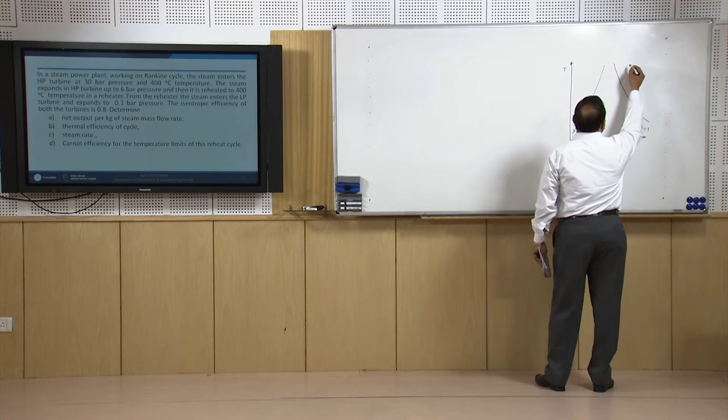So at 30 bar, 400 degree centigrade, the steam enters the turbine. P1 is 30 bar and T1 is 400 degree centigrade. The steam expands in the HP turbine up to 6 bar pressure and is then reheated to 400 degree centigrade again.

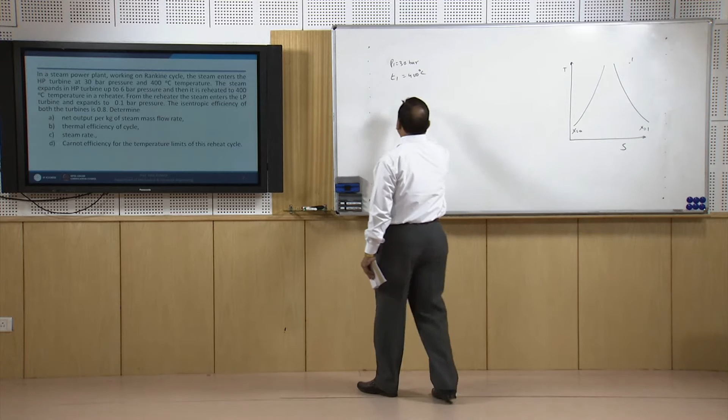That temperature is restored in a reheater. From the reheater, the steam enters the low pressure turbine and expands to 0.1 bar pressure. The isentropic efficiency of both turbines is 0.8.

Now let us find out the state of steam at 30 bar pressure and 400 degree centigrade temperature. Looking at the steam table, 30 bar is 3 megapascal. At 3 megapascal pressure, the saturation temperature is 233.85 degree centigrade, which means the steam is superheated.

For superheated steam at 400 degree centigrade, the enthalpy of the steam is, sorry, the enthalpy is 3231.7 kilojoules per kg. So H1 is 3231.7 kilojoules per kg, and T1 is already given, so it is superheated steam.

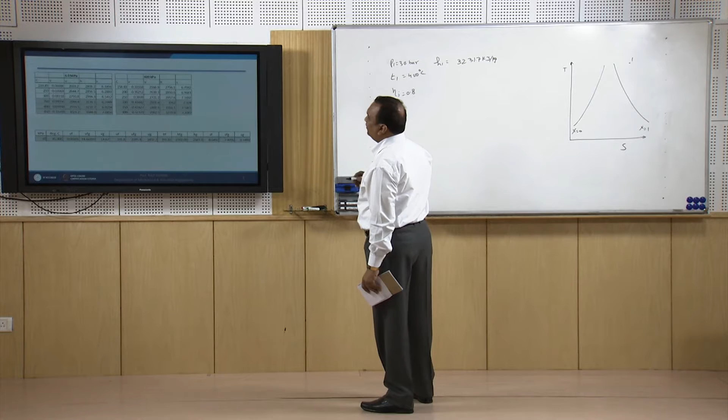Now for entropy, since the expansion is an isentropic process, the entropy at this stage is 6.9232 kilojoules per kg Kelvin.

So we have the state fixed. Now isentropic expansion takes place up to 6 bar, state 2. At 6 bar, entropy remains constant. Let us look at the properties at 6 bar, that is 600 kilopascal, with constant entropy.

When the entropy remains constant, for saturated vapor the entropy is 6.7592. It means at 6 bar the steam is still superheated, and through cross interpolation, because at 400 degree centigrade it is 7.7, 6.92 will lie between these two temperatures, 200 degree and 158 degree. So linear interpolation will be done.

We get the value S2 is equal to 6.9232, equal to SF plus X times SFG. A similar type of numerical we have solved in the respective lecture related to vapor power cycles. From here we get the value of X. Now for H2, I have done the cross interpolation.

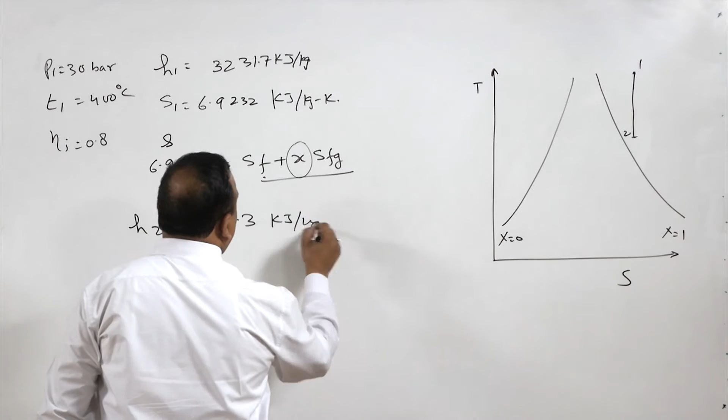Now H2 is 2830.3 kilojoules per kg. X we cannot calculate because this is already superheated, so that cannot be done. So the vapor is superheated at state 1, it is expanded to state 2.

At state 2 it appears to be superheated, and it is superheated because the entropy is 6.7592 and here the entropy is 6.9232. So it is superheated, and through linear interpolation we have calculated the value of H2S. So H1 is 3231.7 and H2 is 2830.3 kilojoules per kg.

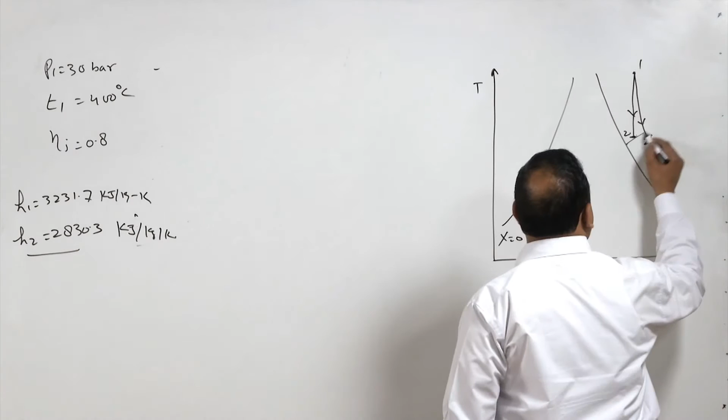But this is not an isentropic process. In actual, the process is like this, this is 2 dash, and it is falling on this line. So H2 dash, then H2 dash minus H1 divided by H2 minus, sorry.

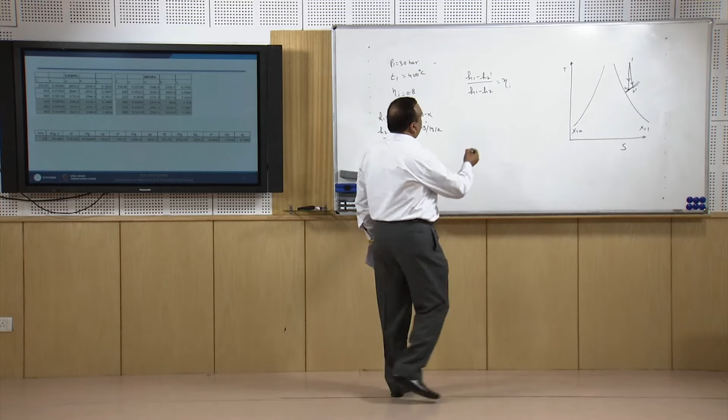H1 minus H2 dash divided by H1 minus H2 is equal to the isentropic efficiency of the turbine, which is already given. We have the values of H1 and H2 as well, so H2 dash can be calculated from here, and H2 dash is 2910.9 kilojoules per kg.

Now this superheated vapor is reheated up to state 3, again at 400 degrees centigrade. So T3 is 400 degrees centigrade. From here, the properties of superheated vapor at 400 degrees centigrade give us the value of enthalpy. H3 is 3270.8 kilojoules per kg, this is enthalpy at state 3.

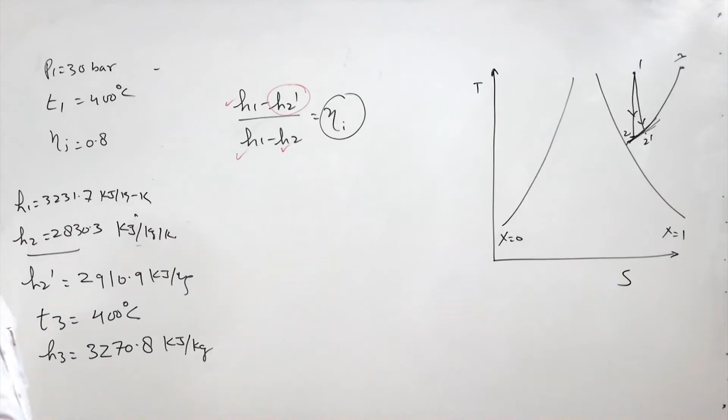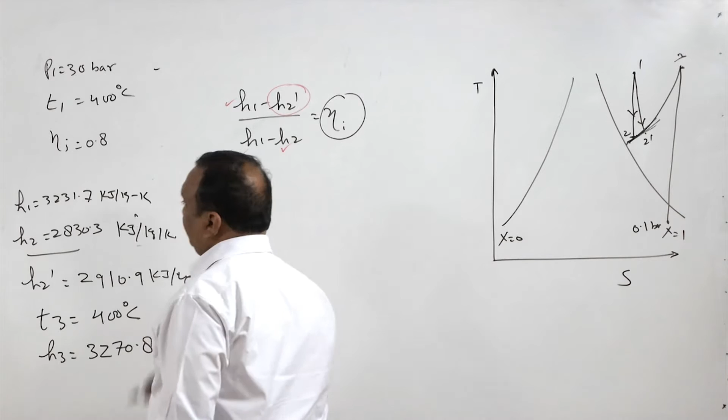Now again the steam is expanding and going up to 0.1 bar. Now entropy at state 3, S3, at 600 kilopascal, 400 degrees, is 7.7097 kilojoules per kg.

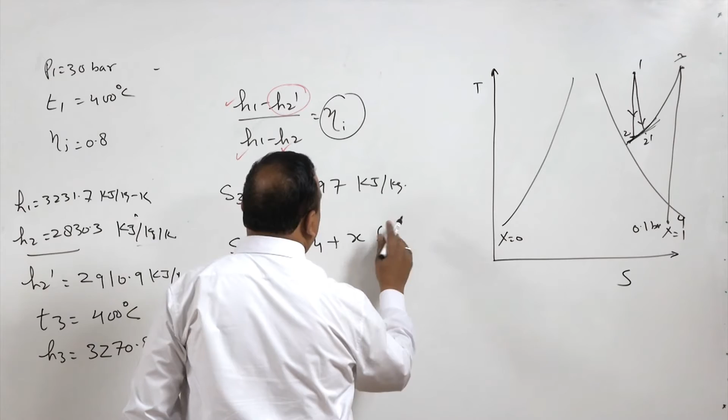Entropy at 0.1 bar, that is 10 kilopascal, is 8.1488. This means the quality of vapor is less than 1. So we will take S3 equal to SF4 plus X times SFG4. Entropy at state 3 is equal to entropy at state 4, because for saturated vapor, the entropy of saturated vapor at state 4 is higher than the entropy at state 3. That is why the vapor available at state 4 does not have quality equal to 1, it is quality less than 1.

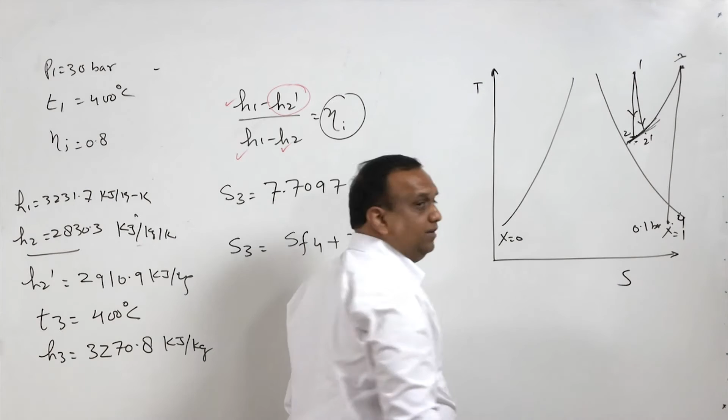I am repeating the steps. First, we have taken superheated steam at state 1, with properties taken from the steam table at 400 degree centigrade temperature and 30 bar. Steam is expanded to 6 bar. We have compared the properties and found that at 6 bar, or 600 kilopascal, the steam is still superheated. By linear interpolation from the steam table, we have calculated the enthalpy at state 2. Efficiency is given, so we have calculated the enthalpy at state 2 dash because efficiency is 0.8.

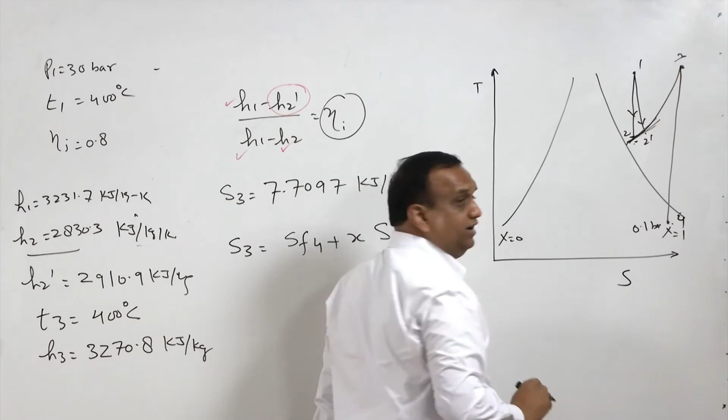Then it is again reheated to state 3, which is at 400 degree centigrade. Those properties are also taken from the steam table for superheated vapor at 600 kilopascal. Then steam is expanded in the low pressure turbine, and at the exit the pressure is 0.1 bar. We have compared the entropies and found that the quality is less than 1. So we are going to use this equation.

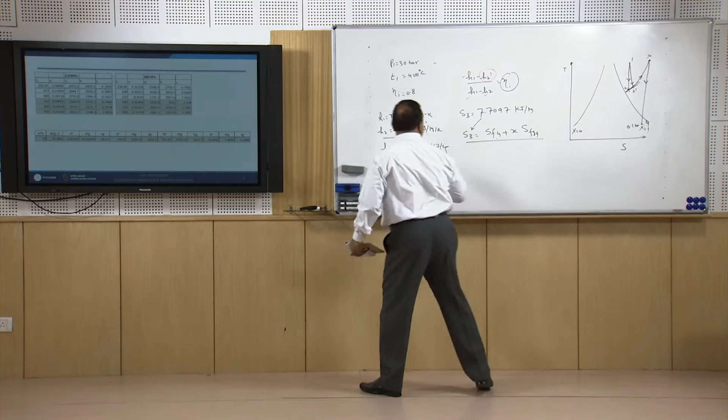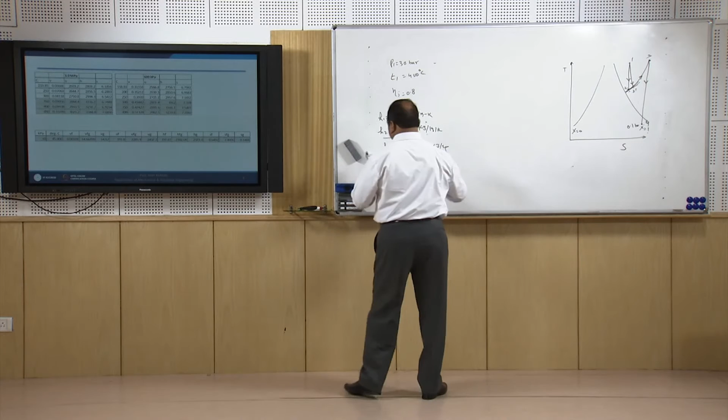S3 we have taken from here, SF4 and SFG4, and SFG4 shall be taken from the steam table, and after manipulation the value of quality is 0.94. So X is equal to 0.94, that is the quality of vapor at this state. Once we have the quality of vapor at this state, we can find H4 as HF4 plus X times HFG4. Using this equation, when we calculate the value of H4, we get H4 as 2440.4 kilojoules per kg.

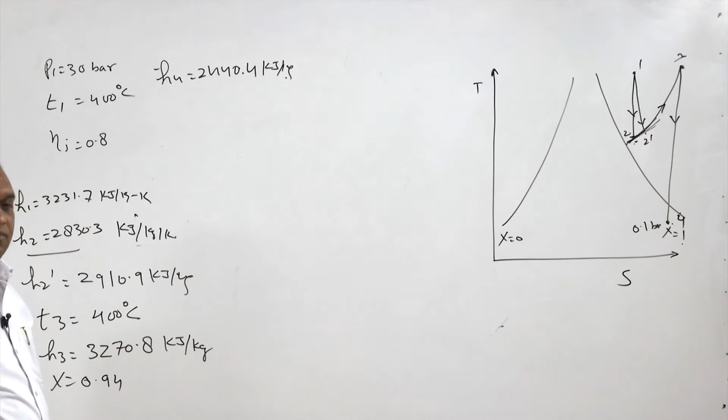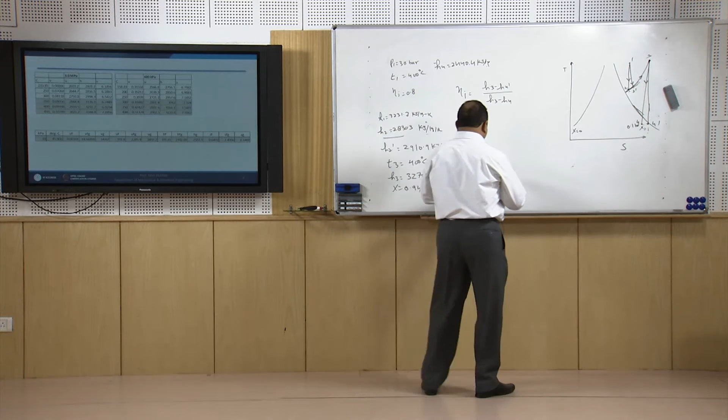But this process is also not isentropic. So we get another state, 4 dash. And for 4 dash, again isentropic efficiency is H3 minus H4 dash, divided by H3 minus H4. Now from here we get the enthalpy at 4 dash. So H4 dash is 2606.5 kilojoules per kg.

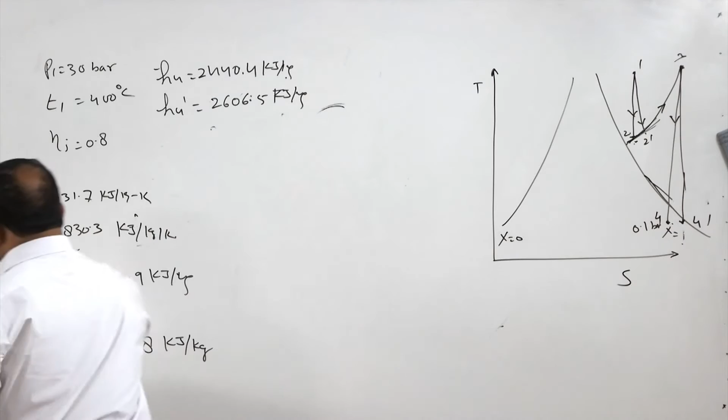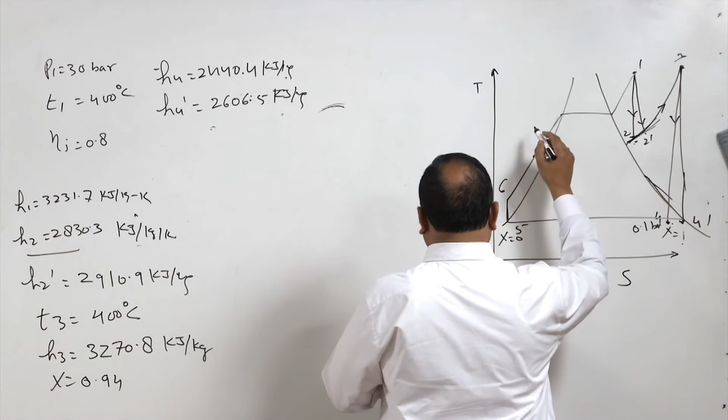Now we have enthalpies at all the salient points. This vapor is then available at the exit of the turbine. It is condensed, fully condensed, then we get state 5, then pressurized, and then it goes to the boiler, and then like this: 5, 6, 7, and then 1, this is 8 and then 1. So feed water goes to the boiler at pressure at state 6, heat is added here up to state 1, expansion in high pressure turbine, then again reheat, then expansion in low pressure turbine, and then condensation in condenser.

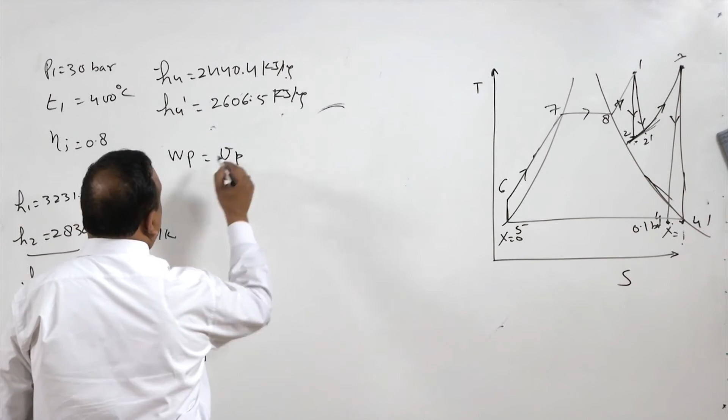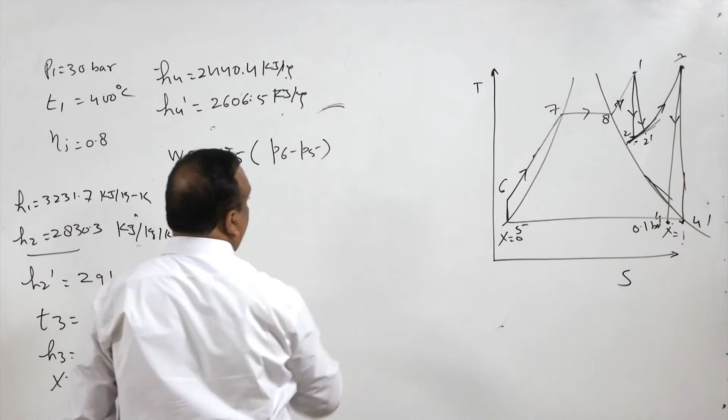Now work of the pump is equal to specific volume at state 5 times P6 minus P5. P5 is 0.1 bar, P6 is 30 bar. So it is 101 into 10 to power minus 5, times 30 minus 0.1 into 10 to power 2. That gives kilojoules per kg input given by the pump, that is V dP. Because this is given in bar, we have converted into kilopascal. This pressure in bar is converted into pressure in kilopascal, and then we have calculated the work of the pump.

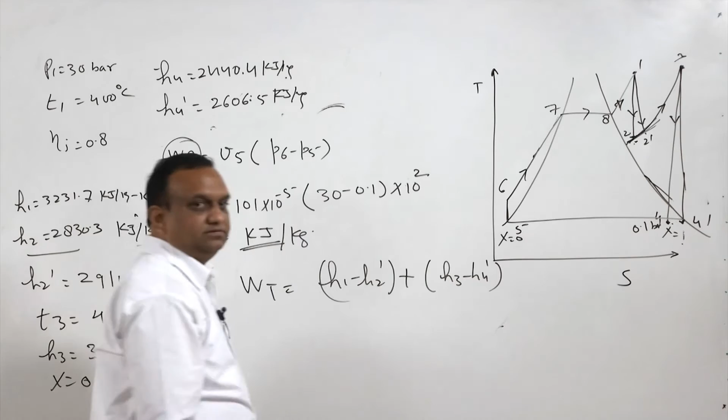Now work of the turbine is equal to H1 minus H2 dash plus H3 minus H4 dash. This is because we are getting work output from here and work output from here. Net output is less because part of this energy is used for running the pump. So this will be minus work of the pump, giving the net output from the cycle. Output of the turbines minus energy consumed by the pump.

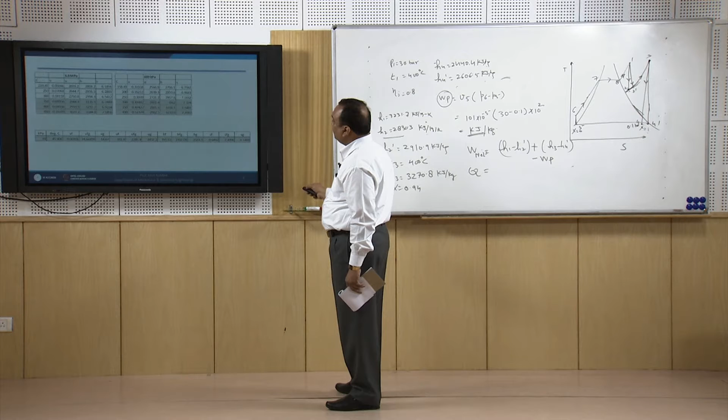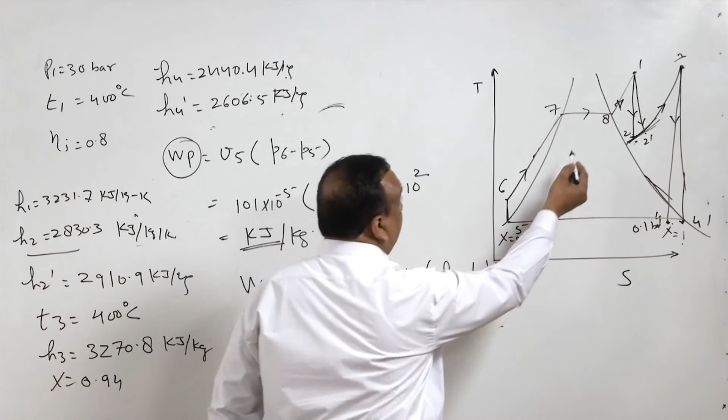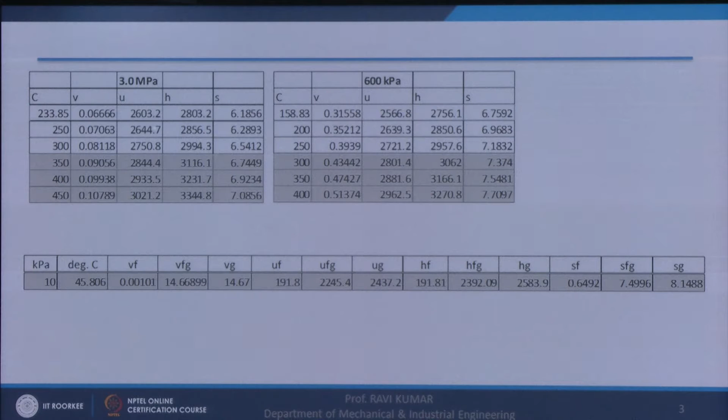So heat added during the process H6 to H1, we can take as H1 minus H5, this enthalpy minus that enthalpy, minus work consumed by the pump, because this energy is not added in the boiler.

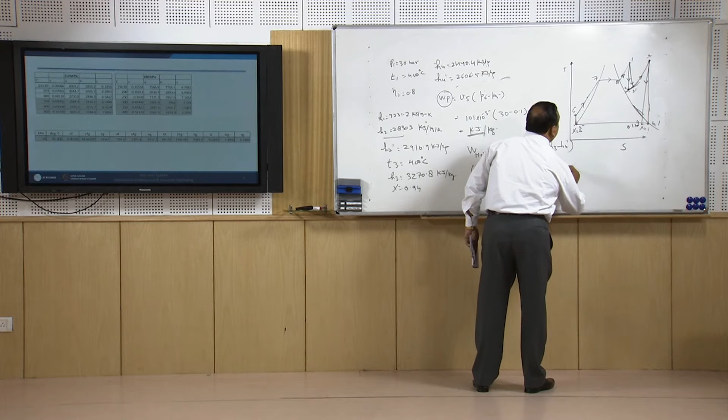So minus work of the pump. That is the net heat added from state 1 to state 6, plus heat added during state 3 to state 2 dash, because it is a reheat cycle, plus H3 minus H2 dash. This is the net amount of heat added in this cycle.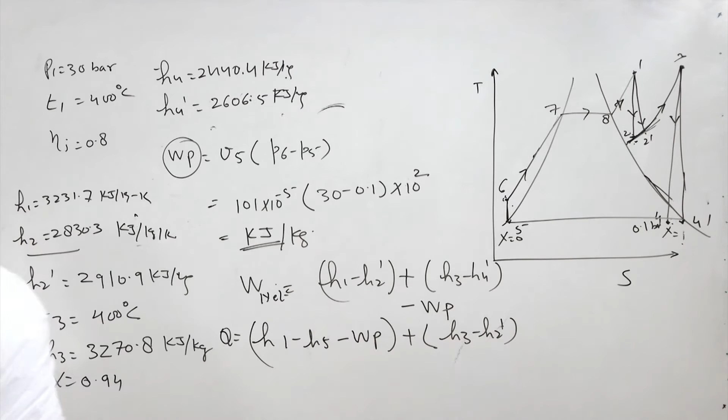So in this question we have to find the net output per kg of steam mass flow rate. The net output we are getting from this equation, all the values are known to us. Thermal efficiency of the cycle: we take the ratio of net output divided by heat supplied, which gives the thermal efficiency of the cycle.

Now the third one is steam rate. Steam rate is 3600 divided by W, that is the output, and this will be in kg per kilowatt hour.

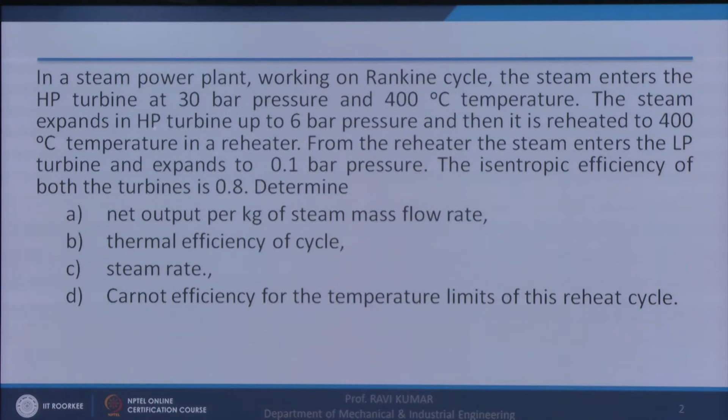Next is Carnot efficiency for the temperature limits of the reheat cycle. The minimum temperature is this, maximum temperature is this. So we can always calculate the Carnot efficiency of the cycle.

Now after this we will take another numerical on gas turbines. We will quickly go through the steps to solve this numerical.

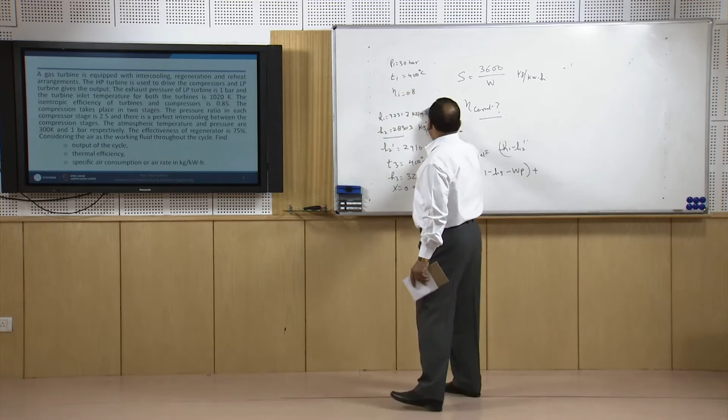This numerical has two-stage compression. The gas turbine is equipped with intercooling, regeneration and reheat arrangements. The HP turbine is used to drive the compressor and LP turbine gives the output. So there are two turbines, one driving the compressor and another giving the output.

The exhaust pressure of LP turbine is 1 bar and the turbine inlet temperature for both turbines is 1020 Kelvin. The isentropic efficiency of turbine and compressors is 0.85. The compression takes place in two stages, so there are two compressors and two turbines.

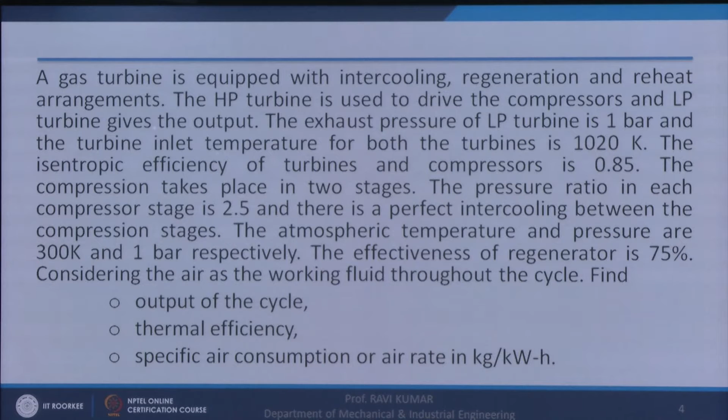The atmospheric temperature and pressure are 300 Kelvin and 1 bar respectively. The effectiveness of regeneration is 75%. Consider air as the working fluid throughout the cycle. Find the following: output of the cycle, thermal efficiency, specific air consumption in kg per kilowatt hour.

So it is a cycle drawn on a temperature-entropy diagram. It has two-stage compression: 1 to 2, with a certain isentropic efficiency to 2 dash, then cooling. After cooling, again it is 3 and then this is 3 dash.

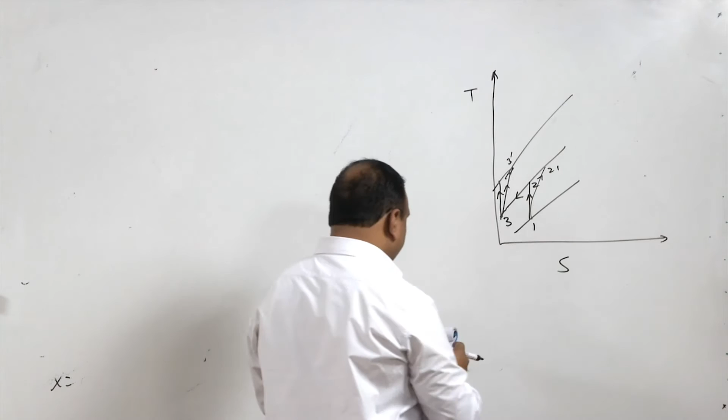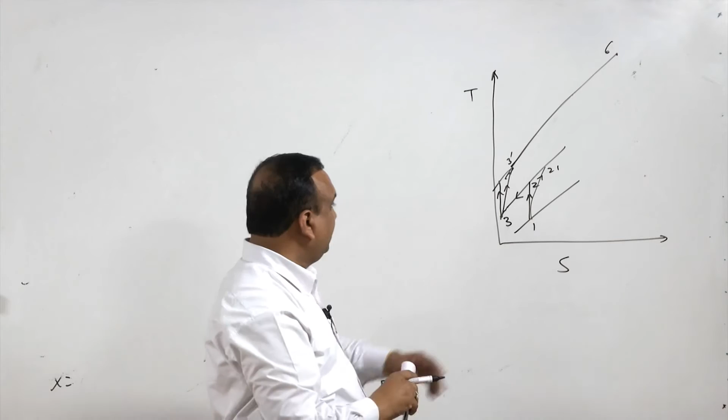So first compression, then intercooling, then again compression. Then in the combustion chamber there are two turbines. So the state is T6, and then expansion is the high pressure turbine.

Then we get T6 to 7, state 7, then again, temperature at 6 is equal to temperature at 8, then again expansion and we get state 9 and this is 9 dash.

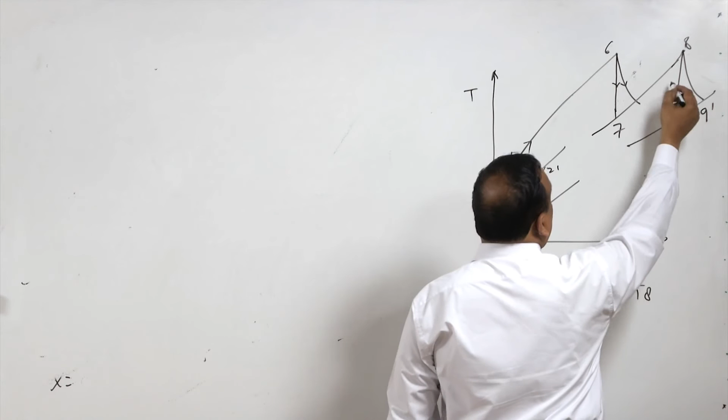So: compression, then cooling, because there is a perfect intercooling, then T1 is equal to T3, then heat addition, expansion in turbine, and then again reheating, and T6 is equal to T8, as given in the problem statement, then expansion in the high pressure turbine and low pressure turbine.

This is the arrangement. Now here, first of all, we will calculate the value of T2. T2 is equal to T1 multiplied by P2 by P1 raised to power gamma minus 1 over gamma. Now T1 is 300 and P2 is 2.5.

Pressure ratio in each compression stage is 2.5 raised to power 0.286, and this will give us 389.8 Kelvin. So T2 is 389.8 Kelvin.

Now, similarly, we will calculate T2 dash, and in order to calculate T2 dash, again the efficiency is equal to T2 minus T1 divided by T2 dash minus T1. Here we have the value of T2 and T1, and efficiency is also with us. So using these values we will get T2 dash as...

405.6 Kelvin. Now we need not calculate the value of T3 and T3 dash, because isentropic efficiency is same, so T2 dash is equal to T3 dash, and T1 is equal to T3. So T3 dash is also equal to T2 dash.

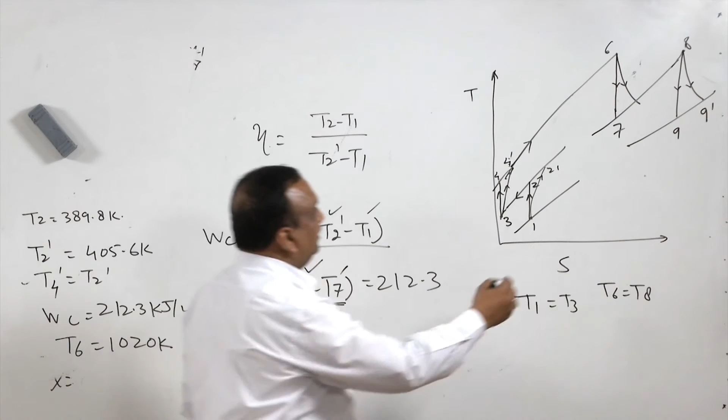T6 minus T7 is equal to 212.3, and T6 we have with us, 1020 Kelvin. So T6 is with us, we can calculate the value of T7. Sorry, here there is a correction: instead of T6 it is T7 dash, because power is developed in this process. So Cp times T6 minus T7 dash, from here we will get the value of T7 dash, and that is equal to 808.8 Kelvin.

Once we have the value of T7 dash, we can calculate the value of T7. It is T6 minus T7 dash divided by T6 minus T7, efficiency of the turbine is 0.85. T6 we already have, given in the problem statement, T7 dash we have calculated right now. Now we can calculate the value of T7. The T7 is 771.1 Kelvin.

Sorry, it's 771.5 Kelvin. We already have the value of T7, we have the value of T6, we also have the value of P6. Now we can get the value of P7. So T6 by T7 is equal to P6 by P7 raised to the power gamma minus 1 over gamma. From here we will get the value of P7. Now the P7 is 2.35 bar.

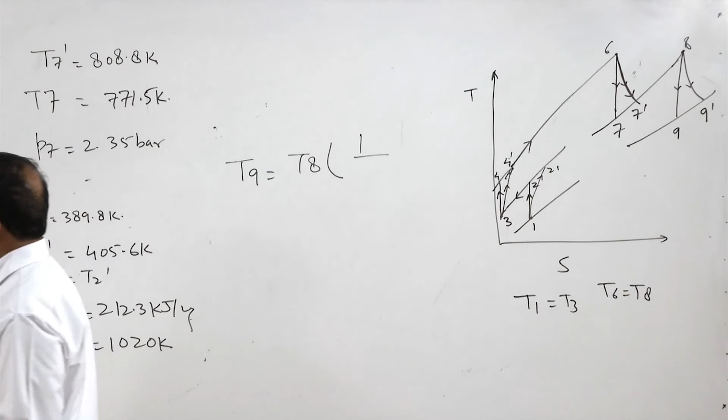Now P7 is same as P8, it is a constant pressure process. Now we have the value of T8 and P8, we can find the value of T9. T9 is equal to T8 times 1 by exhaust pressure, which is 1 bar. So 1 by, or we can write P9 by P8, raised to the power gamma minus 1 over gamma. So this is 1 bar and T8 is 1020, 1 by P8, P8 is P7, 2.35, raised to 0.286.

This will give the value of temperature at state 9, and this is 799.1 Kelvin. Again we have the efficiency of this, 0.85, and we can calculate the value of T9 dash, and T9 dash is 872.2 Kelvin. Now we have temperatures at all salient states or salient points.

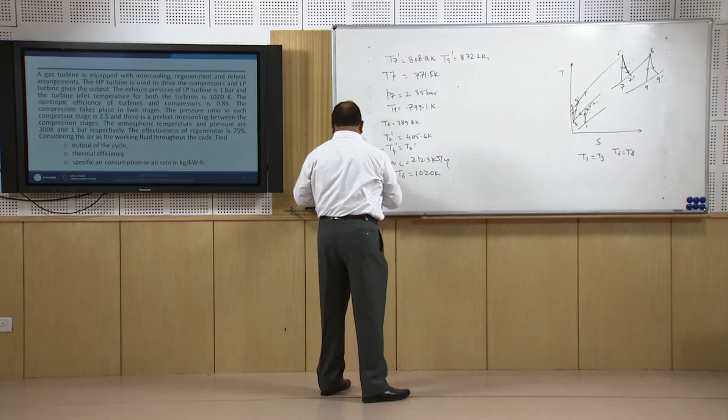Now work of the turbine is equal to Cp times T8 minus T9 dash during this process. Cp for air we know, that is 1.005, times 1020 minus 832.2, and this work of the turbine is equal to 188.7 kilojoules per kg.

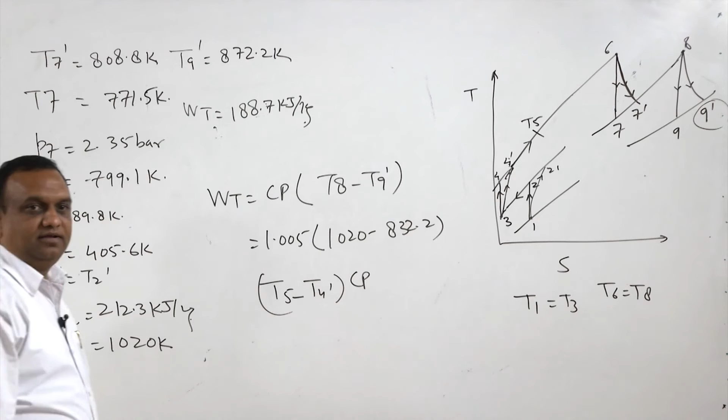Now with the exhaust of this, heating of the gas which is coming from the compressor is done. So gas available is at T9 dash, and compressor outlet is T4 dash, and suppose it is heated up to T5. So actual heat transfer is T5 minus T4 dash multiplied by Cp, divided by maximum possible heat transfer, that is T9 dash minus T4 dash into Cp, and that is equal to how much?

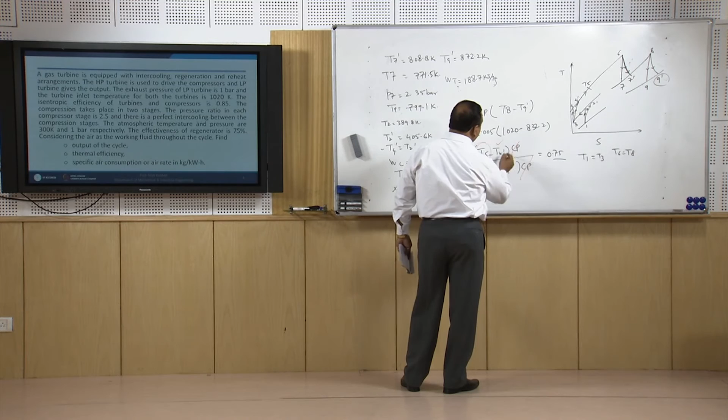Effectiveness is 75%, 0.75. Now from here we will get the value of T5, because T4 dash is with us, T9 we have already calculated, T4 dash and Cp will be cancelled, 0.75 is given. So from here we will get the value of T5, and T5 is 725.5 Kelvin.

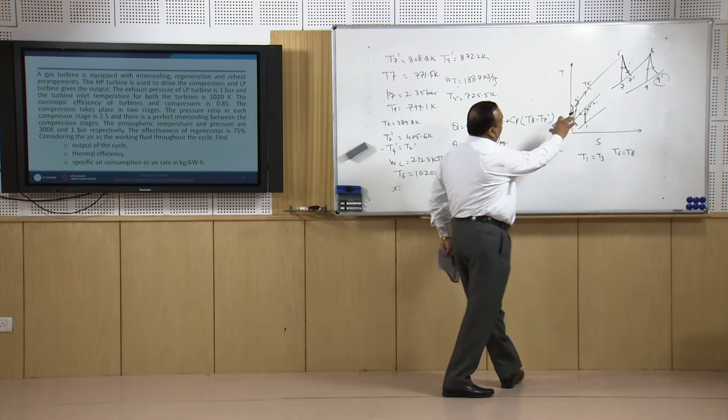Now heat added in the cycle. Now heat added is Q. Now heat added is enthalpy at 6 minus enthalpy at 5. So Q is Cp times T6 minus T5, plus Cp times T8 minus T7 dash. We have temperatures at all these points. Cp we can take for air, and now we get the value of Q as 508.1 kilojoules per kg, because in the entire cycle heat is added at two places, here and here, and this much heat is coming from the exhaust gases.

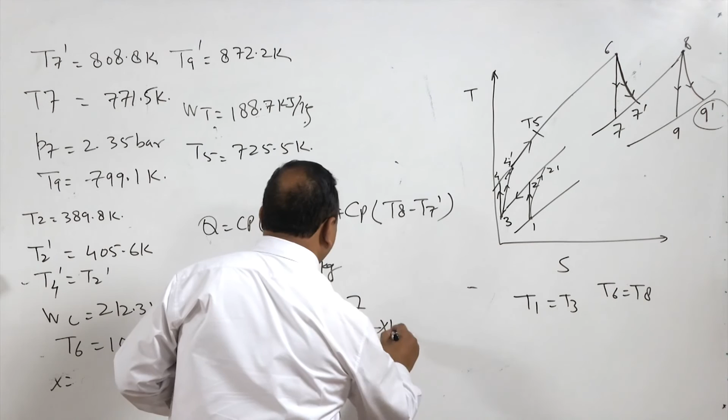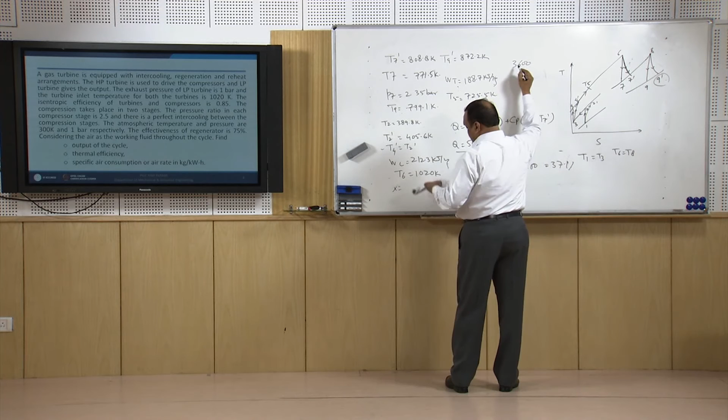Now we have the value of Q. Thermal efficiency is going to be the output of this turbine divided by Q, because this output of the turbine is used to run the compressor. So it is going to be 188.7 divided by 508.1 into 100, and this is going to be 37.1%. And specific air consumption is nothing but 3600 divided by work of the turbine, 188.7, and that is going to be equal to 19.08 kg per kilowatt hour.

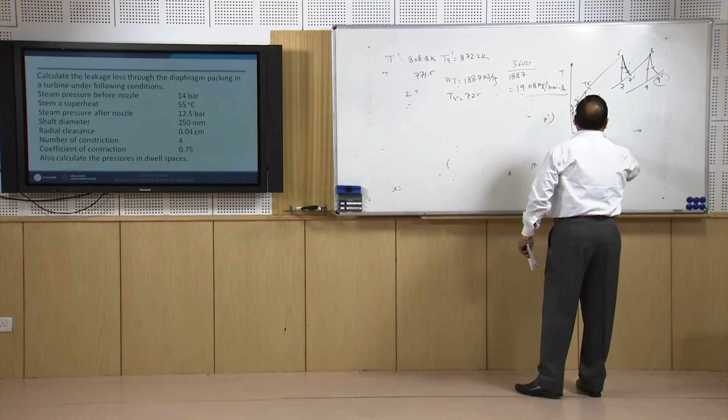Now after this we will quickly go for this numerical. This is a very interesting numerical on the leakage or losses in steam turbines. In this numerical, it is stated that we calculate the leakage loss through diaphragm packing in a turbine under the following condition: steam pressure before nozzle, steam...

So we have to calculate the leakage through the diaphragm. In the diaphragm, the nozzles are fixed. The steam pressure before nozzle is 14 bar, steam superheat 55 degrees centigrade, steam pressure after nozzle is given, shaft diameter is given, radial clearance is given. So the leakage will take place through the radial clearance, and there are constrictions. I will draw a larger figure.

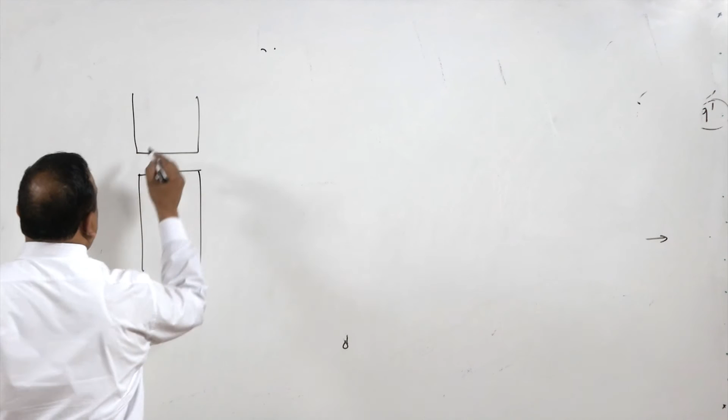There are constrictions provided here, and the number of constrictions is 4. So 4 constrictions are provided, which means dwell spaces are 3. This side pressure is 14 bar.

Now we have to calculate how much steam will leak through the constrictions. Clearance is also given here. Radial clearance is 0.04 centimeters, which is around 400 microns.

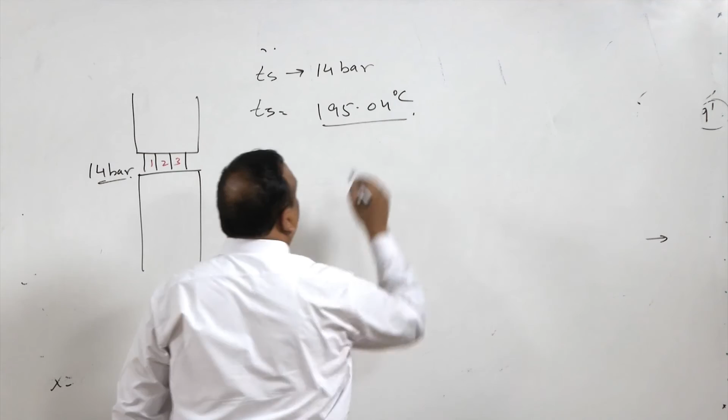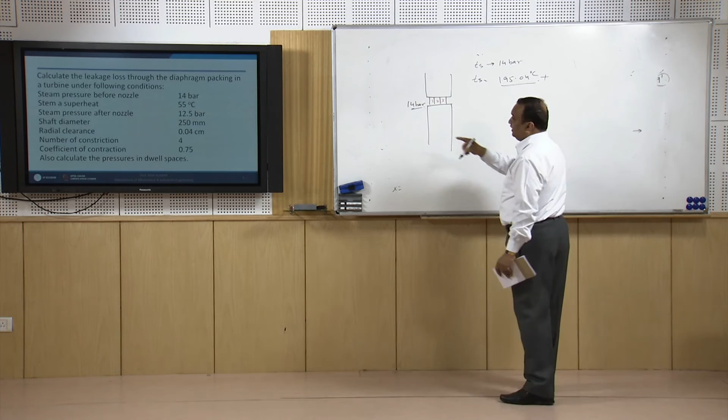First of all, from the steam table, Ts corresponding to saturation temperature at 14 bar. So Ts is equal to 195.04 degrees centigrade. This is the saturation temperature from the steam table, but the steam is superheated by 55 degrees centigrade, so degree of superheat is 55 degrees centigrade. So we will add 55 here.

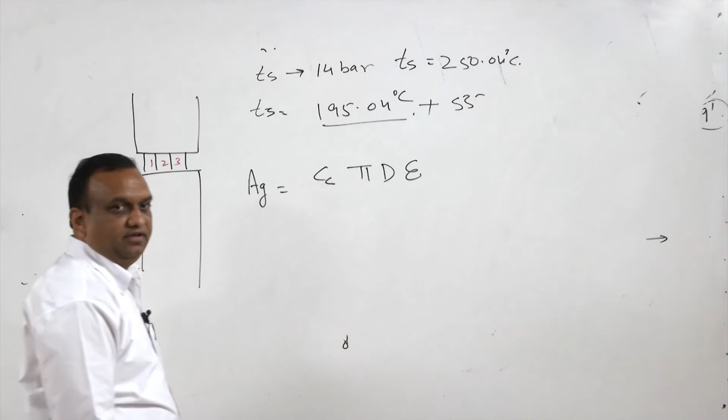So temperature of the steam is 250.04 degrees centigrade. Now area of constriction Ag. Ag is Cc pi d, and this is clearance. This is the contraction coefficient.

When there is a flow in sudden obstruction or sudden contraction or enlargement, vena contracta is formed, so that has been taken into account here in Cc.

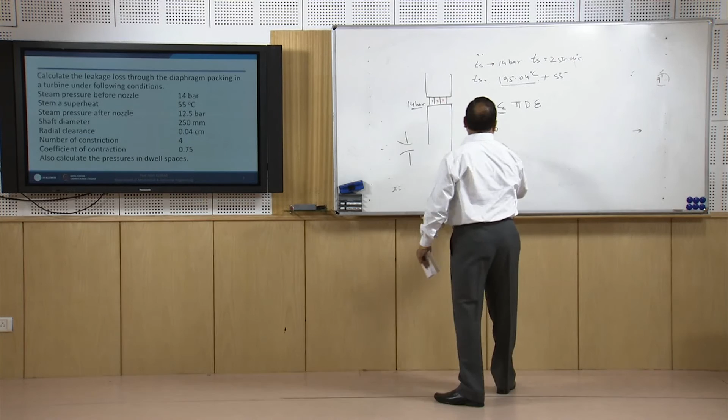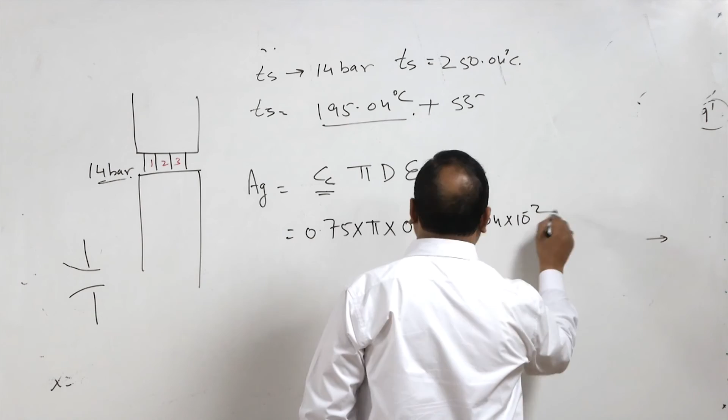Coefficient of contraction is 0.75, into pi, into diameter of 250 mm, into 0.04 into 10 to power minus 2, and that gives the area. So Ag is 2.355 into 10 to power minus 4 meter square.

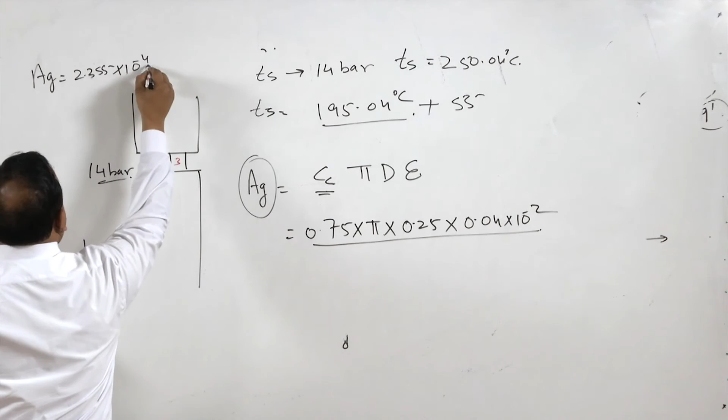Second thing we have to see: on the trailing side, is the pressure greater than critical pressure or less than critical pressure, because in both cases the analysis will be different. So on the trailing side, the critical pressure is...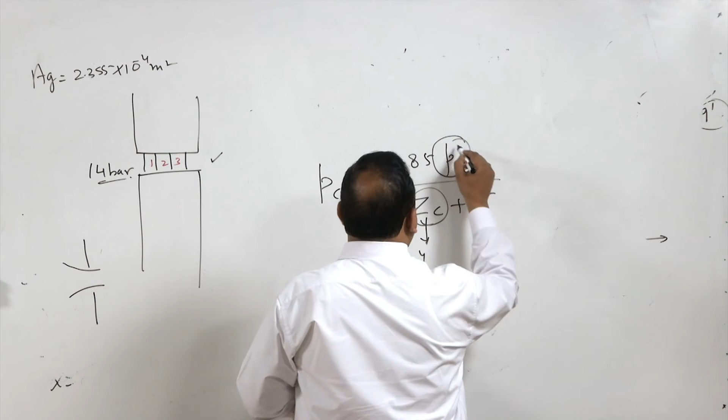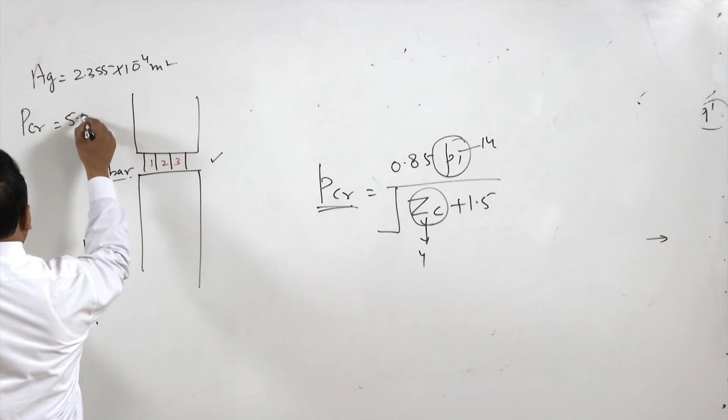0.85 P1 under root of ZC plus 1.5. Here ZC is the number of constrictions, there are 4, and P1 is 14 bar. From here we get the critical pressure as 5.074 bar. Now this critical pressure is less than the pressure on that side, which is 12.5 bar.

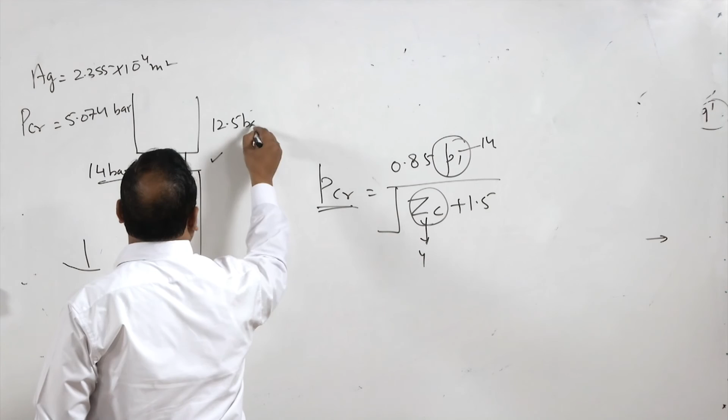It means on the other side the pressure is not less than the critical pressure, it is above the critical pressure. When on the other side the pressure is above the critical pressure, the leakage through the constriction will be...

Mass leak is going to be AG under root of P1 square minus P2 square divided by Z P1 V1.

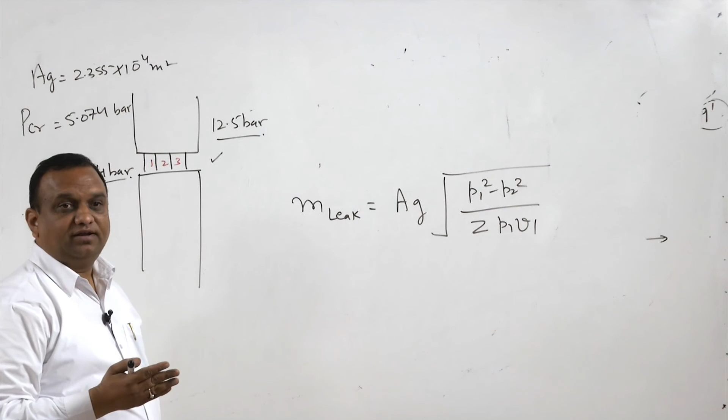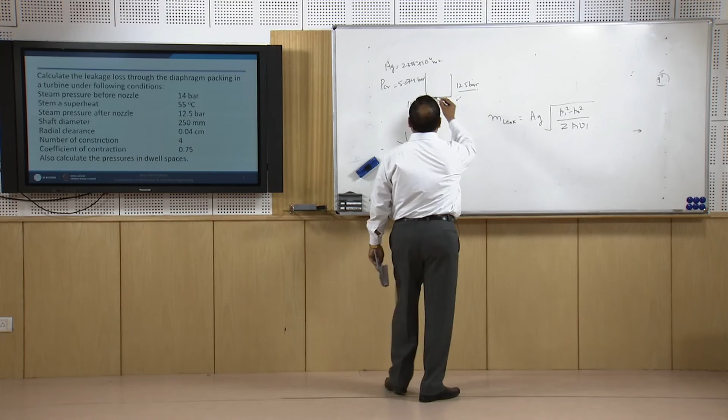Now we have the value of P1 as 14 bar, P2 as 12.5 bar, we will convert them into kilopascal, and then Z, P1 same, Z P1 and specific volume. So specific volume of superheated steam, we have taken from the steam table as 0.1635 meter cube per kg.

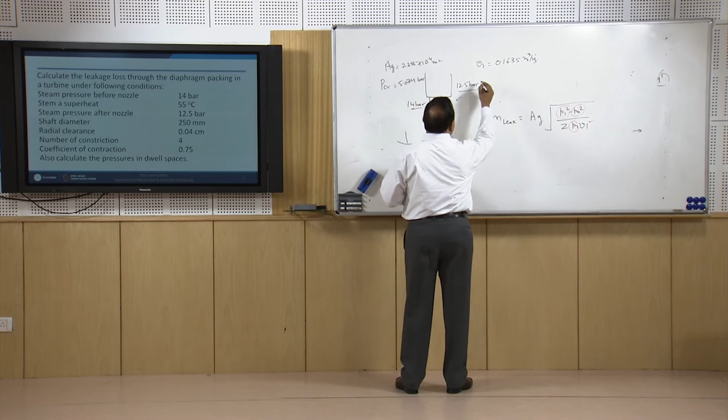Initially we had steam which is superheated by 55 degrees centigrade, so we have taken the specific volume of that steam from the steam table. Initial pressure is known, that is 14 bar, and pressure on the other side is 12.5 bar, and this gives the mass leakage as 0.155 kg per second.

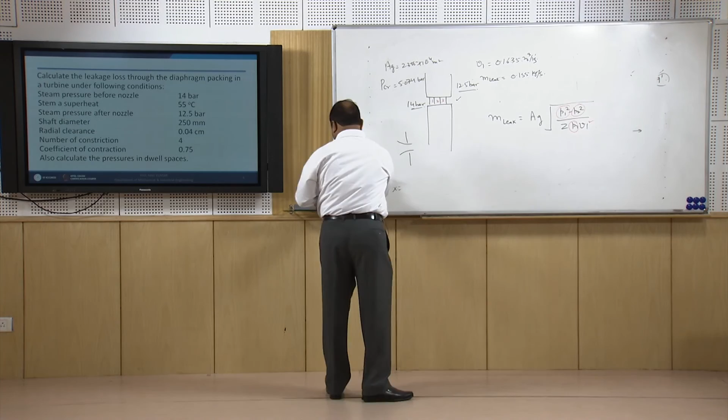So this is the amount of leakage taking place through these constrictions. Now it has 3 dwells, and the number of dwell spaces is 3, and M is also equal to AG under root of P1 square minus Px square divided by ZC P1 V1.

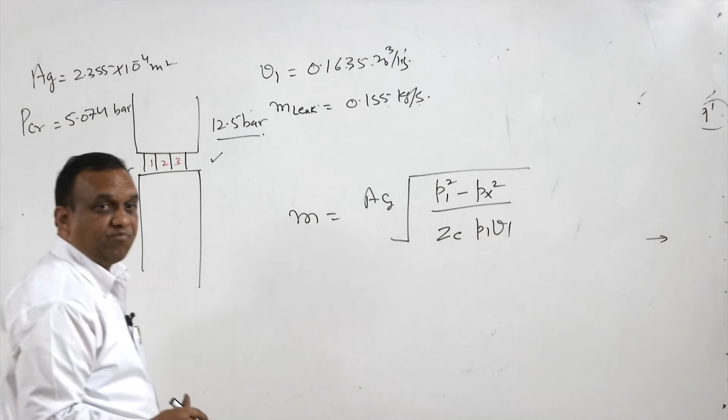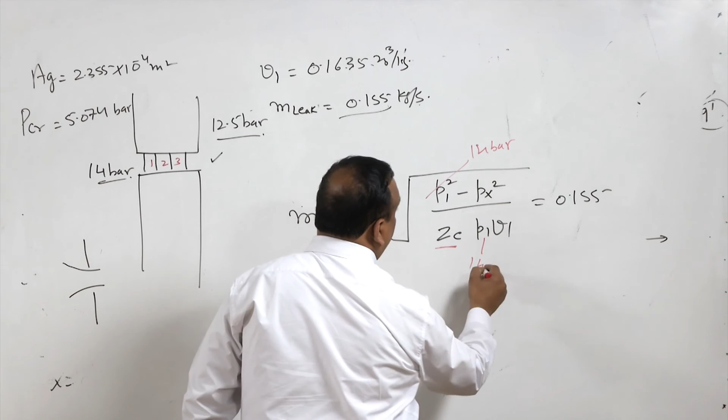Now, here leakage is the same 0.155 since it is moving in this direction. P1 is 14 bar. Now ZC we have to see, P1 is again 14 bar, Px we have to calculate.

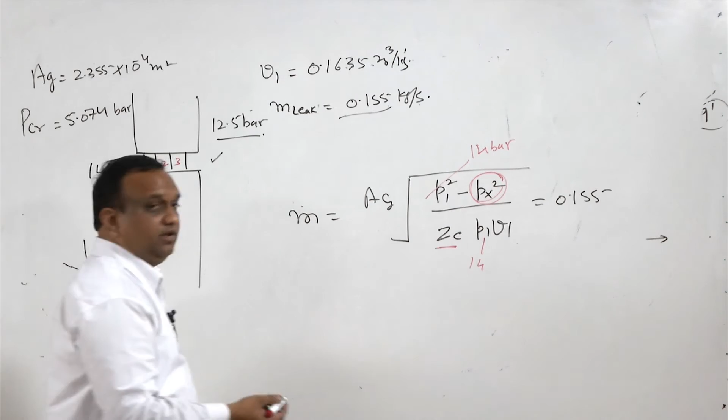I think we also have to calculate the pressures in the dwell spaces: pressure in dwell space 1, pressure in dwell space 2, pressure in dwell space 3. The rest of the information is with us, and if we put the values...

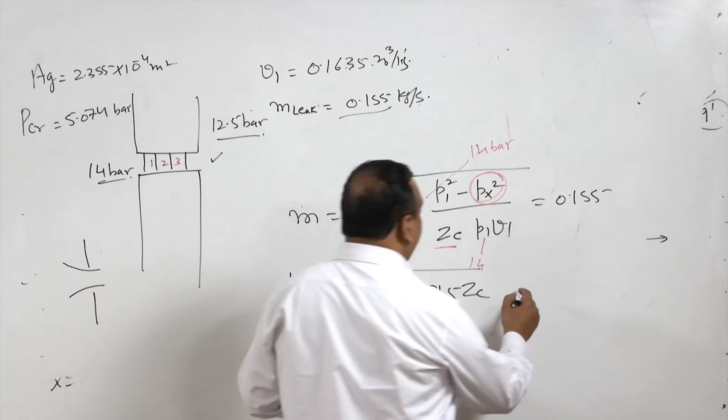We get the value for Px as under root of 196 minus 9.915 ZC. When we put ZC equal to 1, we get the value of Px, or we can say P1 is equal to 13.64.

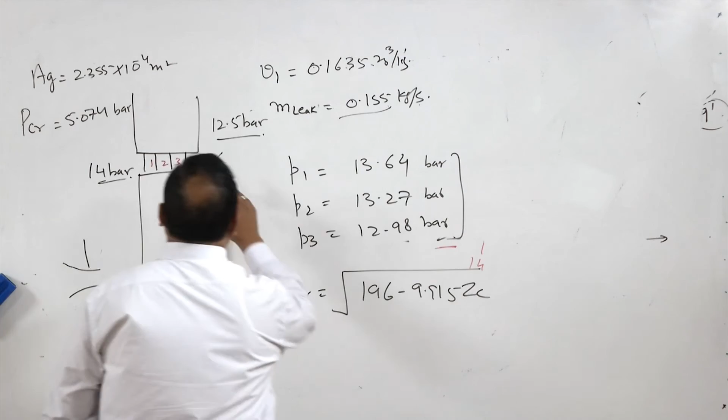When we put ZC equal to 2, we get P2 equal to 13.27, and when we put ZC equal to 3, we get P3 as 12.98 bar. They are all in bar, and beyond that there is a pressure of 12.5 bar. So this is how we can calculate.

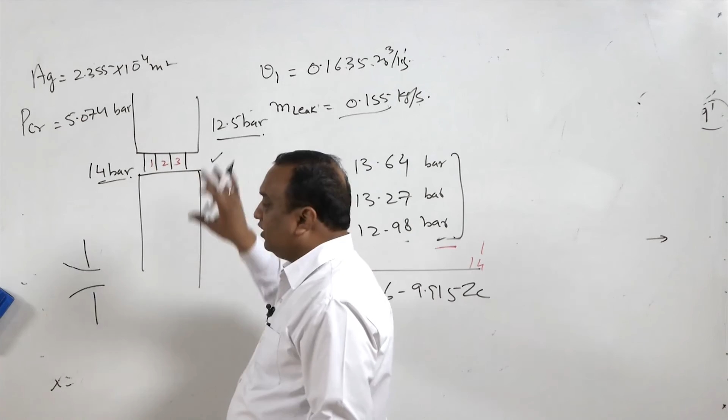Because this information helps in designing the seals for steam turbines. Okay, this was the last lecture.